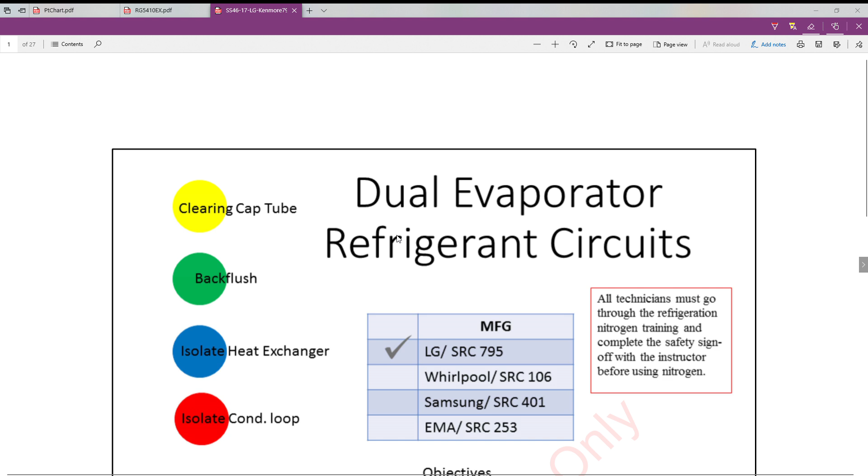So with all that said, to my sealed system brothers, my brothers or sisters, whoever's thinking about getting into sealed systems, or for those who are already in it, stick around. Maybe you might learn something, maybe you already know all of this. Nonetheless, just gonna go over some things tonight.

So tonight's training is gonna be in regards to dual evaporator refrigerant circuits. Now, if you don't have any sealed system knowledge, none of this is gonna make sense. I would say learn that first and then come back and watch this so that you'll know what I'm talking about. But if you do sealed systems, or you're interested in sealed systems, or you're studying sealed systems, this is going to be good stuff tonight.

Well, with all that out the way, let's get right into it. Okay, obviously yellow is clearing the cap tube, they're probably referring to capillary tube. Backflush represents green, blue is isolate heat exchanger, red is isolate condenser loop.

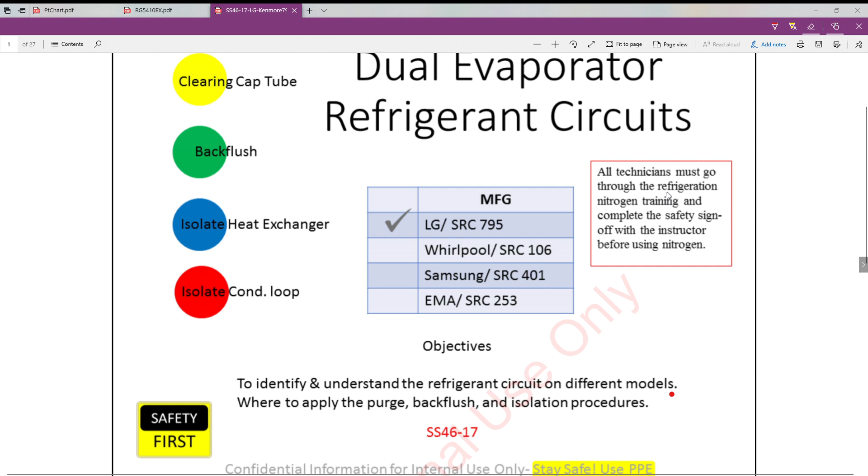Alright, this is in regards to the LG 795. All technicians must go through refrigeration training. Okay, objectives: to identify and understand the refrigerant circuit on different models, where to apply the purge, backflush, and isolation procedures.

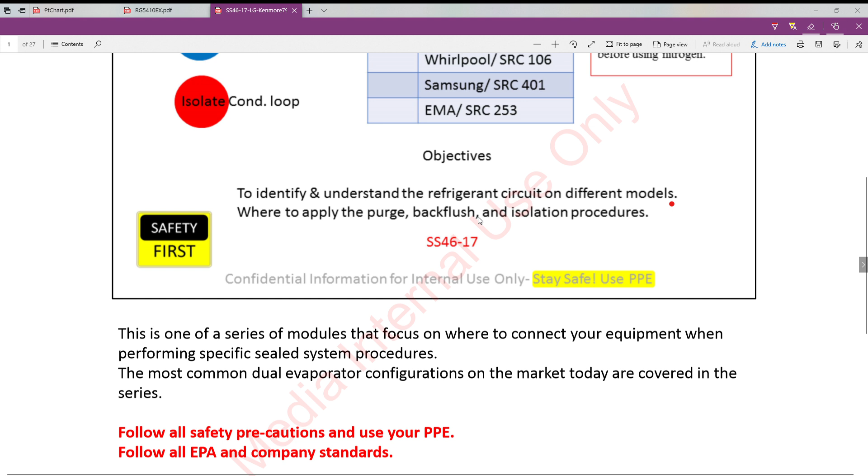Alright, this is one of a series of modules that focus on where to connect your equipment when performing specific sealed system procedures. The most common dual evaporator configurations on the market today are covered in the series.

Follow all safety precautions and use your PPE, I'm assuming that's personal protective equipment. Follow all EPA and company standards.

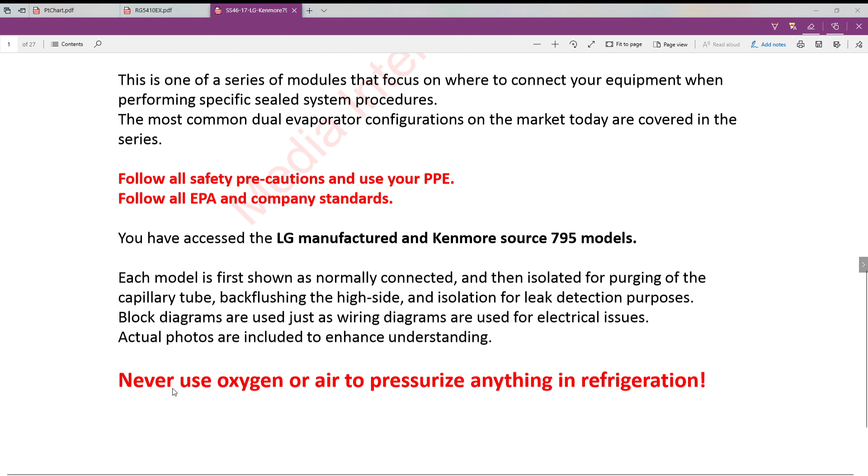Each model is first shown as normally connected, and then isolated for purging of the capillary tube, backflushing the high side, and isolation for leak detection purposes. Block diagrams are used, just as wiring diagrams are used for electrical issues. Actual photos are included to enhance understanding. Never use oxygen or air to pressurize anything in refrigeration.

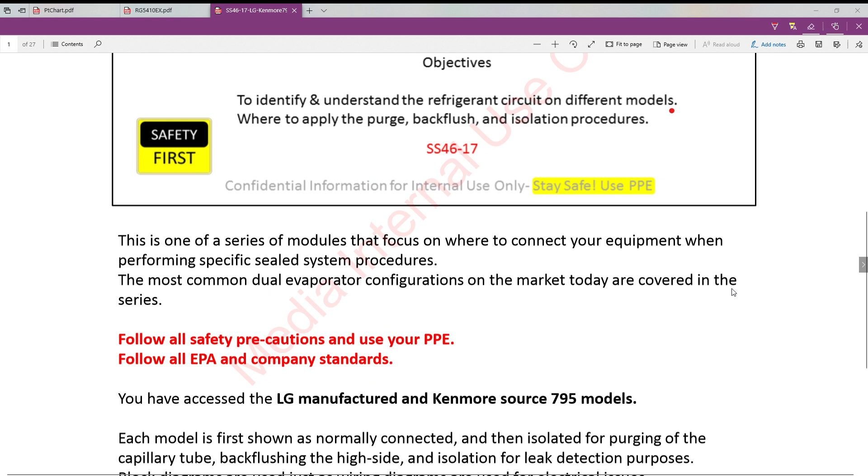Alright, with all that boring stuff out the way, let's get to the meat and potatoes of this thing. Okay, how do we get to page 2 here? Boom, there we go. Alright, ladies and gentlemen, here is your standard refrigeration diagram, let's just go over it.

I hope you can see my mouse. This guy right here: so out of your compressor, out of your high side, it's going to pass through this condenser. Out of this condenser, it's going to go through this little area right here, let's just call that your Yoder loop. It doesn't demonstrate it on here, but it does pass within the internal cavity or internal bulkhead of the refrigerator that we can't see. But after it comes out of that, it passes through the dryer.

Now we're going to go through our, well not capillary, but our three-way valve. So out of the dryer, it's going to go to the three-way valve, and then it's going to have two capillaries. One capillary is going to go to your freezer compartment, which represents FC. The other capillary is going to go to what represents RC, refrigerator compartment.

Now, if you got something coming in, you obviously have to have something coming out. So these two capillaries, this one and this one, they're going to supply our evaporators with freon, and out of our evaporators we're going to return to the compressor. There's a little check valve here, we're going to talk about that check valve and the importance of it.

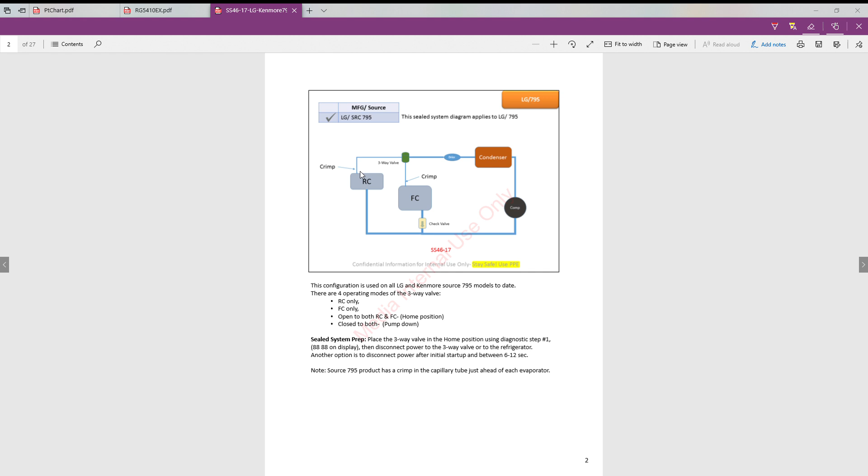All right, what the hell happened there? Okay, all right, let's see. Next page, number 3, right here.

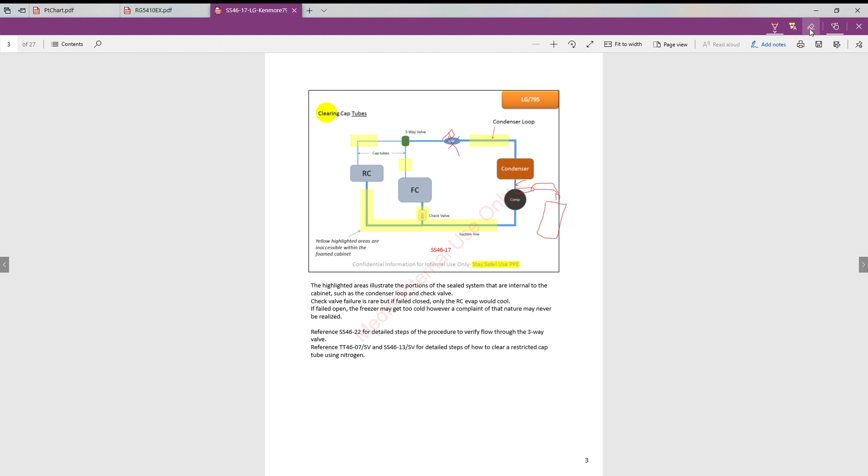Now, on my low side, right here, remember the dryer is disconnected. I would put a valve here, and then I will remove this hose. Let's remove it. Now, what I would do is I'll put the hose here to here,

and I would look at the tag and see what is my low side. It's probably like 100, 125, and then I would blow. Oh, I would disconnect here as well. I would disconnect this part from the compressor so that as I blow through here with my nitrogen, it can go here. And look at the arrow of the check valve. It's going in the way it's intended, out right here. And then it's also going to do the same thing here, because remember, we have it in the home position.

Right there. Boom. And then out. You know what I'm saying? That's my 2 cents on it.

All right, let's see. So as far as check valve failure is rare, here's how it happens. Some guys, remember this compressor, they're not showing it, but it's gonna have a process stub right here. Let's draw it a different color, let's go blue. Let's say that process stub on there, guys are gonna hook up their hose, right? They're gonna hook up their hose. So they're gonna come here to the process stub and go right here, and they're gonna go right here.

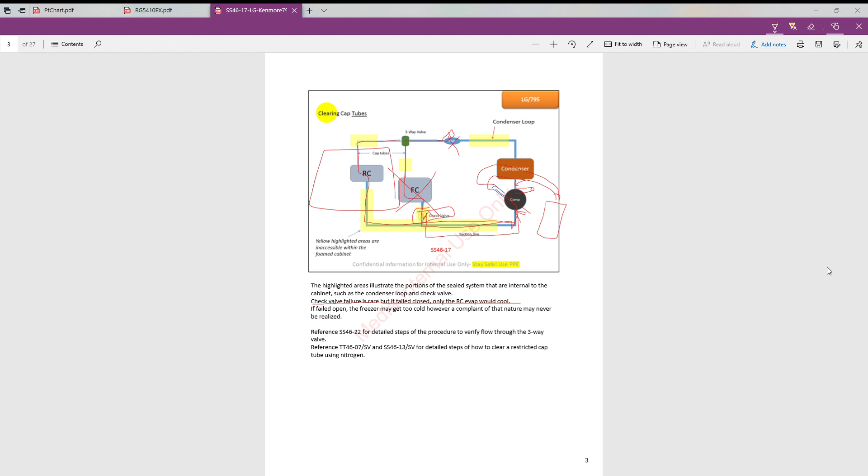Going on to page 4. Boom. All right, so we got some visuals here. What do we got here? Why is this so? All right, well, apparently the screen is here.

All right, so here's our compressor, big black hermetic mushroom shaped guy right here. Big black hermetic seal with the white label on it, right? That's your compressor. Here's your process stub, right? That's where you're gonna do your evacuating, your charging, stuff like that. But remember that this process stub is one and the same as this suction line or low side. Okay? This is your discharge, and as you see, the arrows in yellow, it's going right to your condenser.

Your condenser is more than likely always next to your compressor, but sometimes it may run up the back wall or on the bottom of the box. But typically, the condensers are normally always outside, and the evaporators are normally inside.

After it comes out of your condenser, let's... is there a way to zoom in here? What the hell is going on here? How do you zoom in? Okay, that's contents. Anyway, we'll get more pictures.

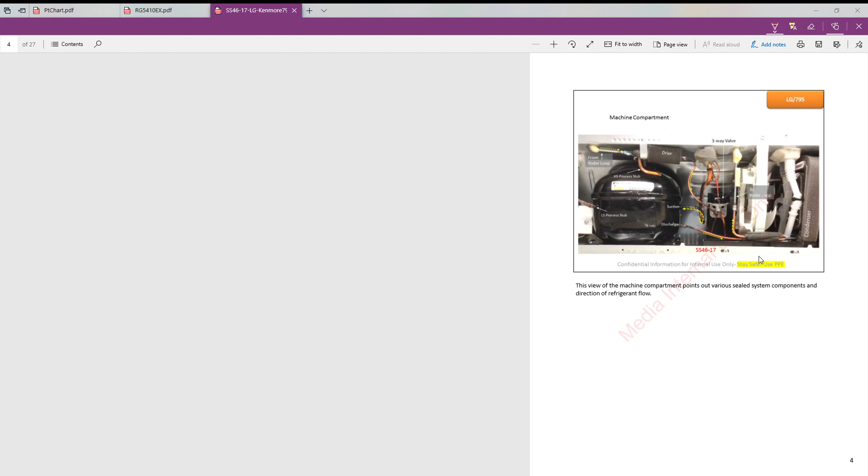Okay, oh much better guys, much better. All right, so again, this is your compressor. We barely see him, but here's your compressor, the black silhouette.

Again, this is your suction line. This goes inside of the cabinet, but this is where your refrigerant, after it comes out of the evaporator, is returning to the compressor. Okay, this is where the compressor is sucking it back toward the compressor, and out of the compressor is going to your condenser.

But for this slide demonstration purposes, they're talking about this three-way valve. Well, let's look at it. You got 3 copper tubes going to it, right? Or coming out of it, or hooked up to it.

Okay, notice one goes to FC evap, freezer compartment evap. One goes to refrigerator compartment evap. And then one, this one here, is coming from your filter dryer.

Okay, now let's see what this says. The blue band on the port tube connects to the refrigerator capillary tube. They're talking about this little blue band here. Right there, you see it? Blue band. But we'll get into that.

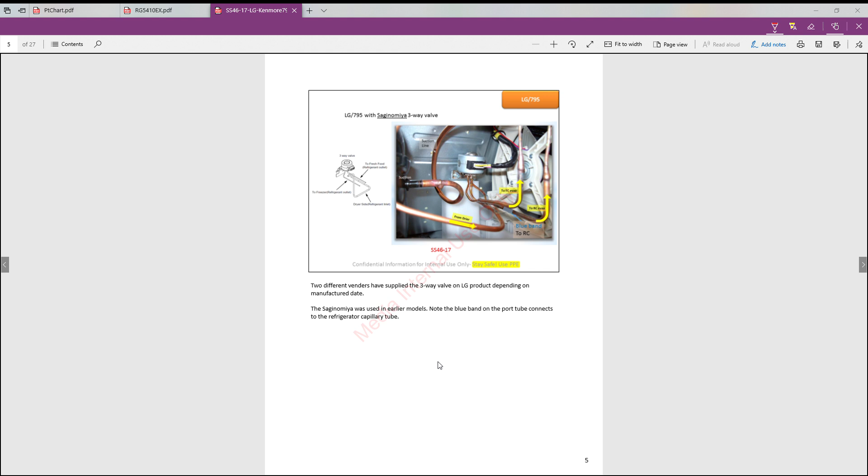For now, stand by on that, because we'll get into that. Anyway, let's look at what we got here. Here's our filter dryer up here. Again, out of our filter dryer, after it comes out of the Yoder loop, first stop out of the Yoder loop, filter dryer. After the filter dryer, it's going to go to that three-way valve.

The third copper tubing is the copper tubing that's coming off the dryer. Okay, again, this discharge is going to the condenser. Off the dryer, this little tube here is our high side process stub. We discussed that on the compressor, the third copper tube coming off the compressor is your process stub on the low side, because that and the suction is one and the same. Well, if we wanted to get into our high side, off of the dryer is how we would get into our high side. Okay, let's move on to the next slide.

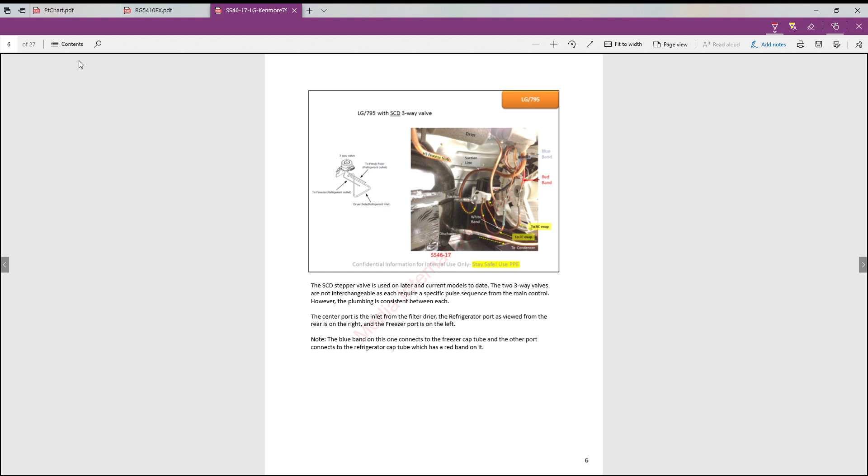All right, let's see what they got to say about it. An initial attempt to establish a clear capillary after recovering. Oh yeah, you remember you got to recover the system. Recovering the system charge requires cutting RC port at the three-way valve and cutting the suction line between the cabinet and the compressor. This illustrates the RC cap.

Guys, the way I'm saying it, in my opinion, would be the best way. That's what they're saying, but nah, I have better luck doing it like this, from the inside and blowing outward. Or you can blow from the rear as well and cut here. You can do it either side, whatever you're comfortable with. But that's what I would say that works.

Okay, what it says? Use up to the maximum of nitrogen pressure, but do not exceed the low side design test pressure rating. That's what I'm saying. See, like it's saying here, do not exceed 170 psi if the low design pressure is rated above 170. So even if it says it's 170 or higher, don't exceed 170. So follow the tag. If it says 120, 130, 140, stick to that, but never exceed 170.

In this setup, the check valve prevents any nitrogen flow through the freezer evaporator in the reverse flow purge. See, that's what they're talking about, like doing it here. That's why I don't do it from this side. That's why I do it from the normal flow so that I don't interfere with the check valve. If you do that, you don't got to worry about it.

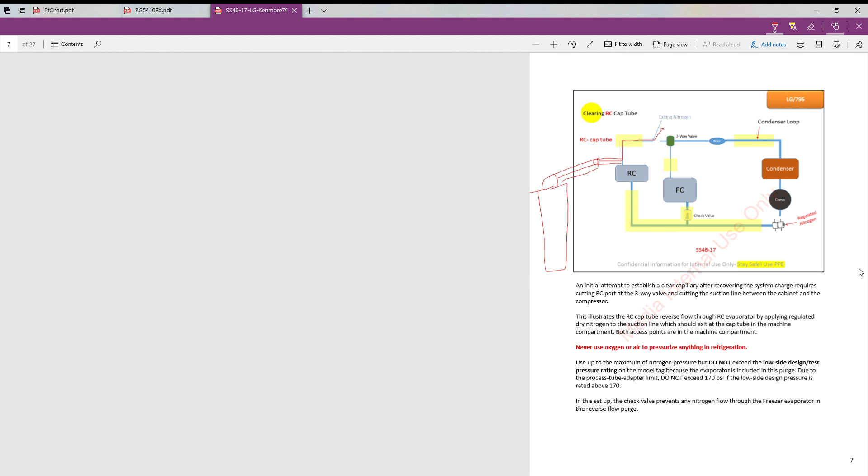All right, let's see what the next tag is. Next slide. Whoa, look at that. There we go, there we go. Okay, so here's what your...

Okay, look. Here's what your inside of your freezer. Here's what the inside of your refrigerator evaporator coils look like. So again, as it's coming out of this, remember the red band? Red band means the refrigerator. Red refrigerator, think of that. Blue freezer, blue cold, blue. Brr. So red refrigerator, blue freezer.

All right, so refrigerator comes here. It enters your evaporator, and then the thick copper line is what's going back into the bulkhead. That's what this one represents. This big thick copper line here, going back to the compressor, the one that says suction line. So from here on the thick copper line, that goes to here where it says suction line, all right? And then RC evaporator capillary from here goes inside, and that's the little thin line we see here, okay?

Same thing with the fresh food, I'm sorry, freezer compartment. Blue band enters, I guess the one with the black tape going around it is the one that comes back to this thick tubing, which comes back to where it says suction line. Okay, once again shown here on the actual product, dash lines are drawn where the heat exchangers and check valve are inside of the foam cabinet wall.

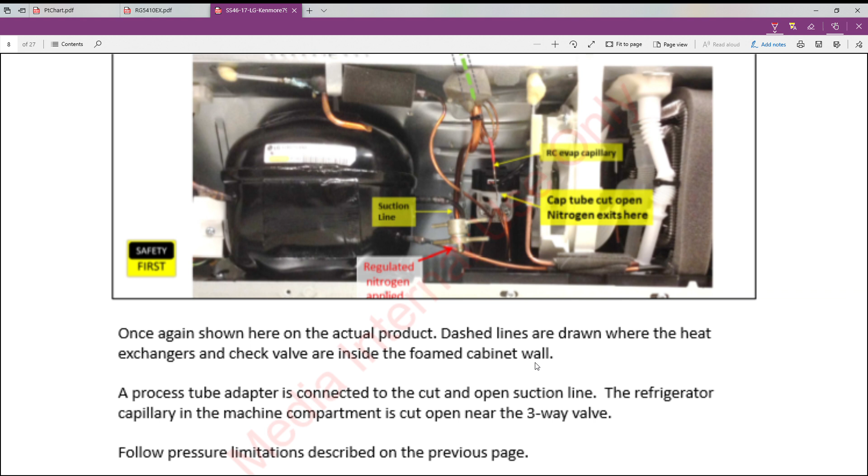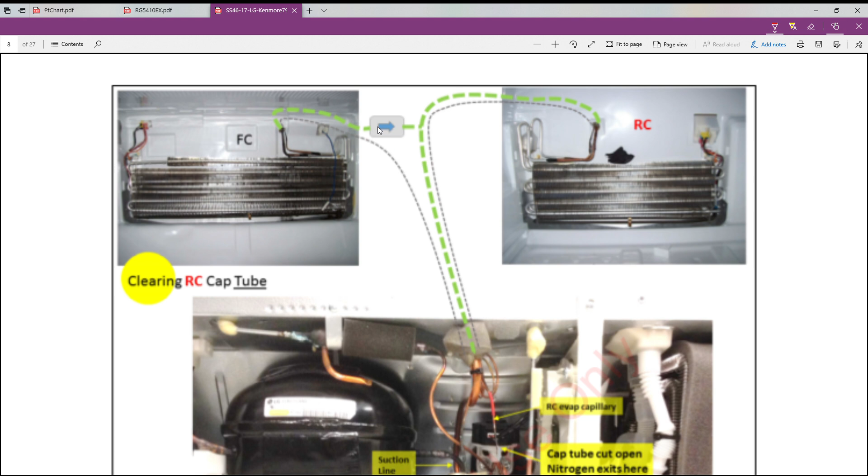The dash lines are where the heat exchangers and the check valve are inside of the cabinet. We can't see them because of the actual cabinet, but these green lines represent that. So this blue check, there's our check valve, here's our heat exchanger, and the green dashes. So blue dots are your capillaries, green dashes are your heat exchangers, and here's your check valve.

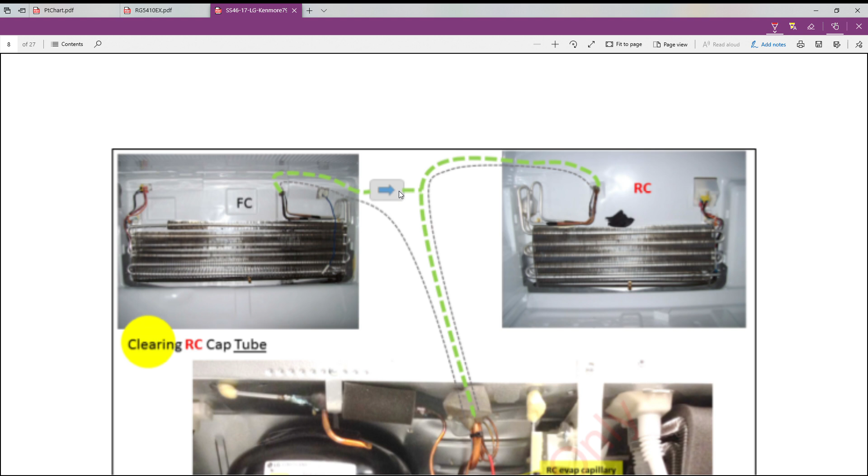Now what's this saying? Follow pressure limitations described. Nitrogen applied to the suction line goes through the RC evaporator, through the refrigerator compartment evaporator, and returns through the cap tube, which is open to the atmosphere, disconnected from the three-way valve in the machine compartment.

Place a shop towel and a container at the exit point whenever purging in order to collect debris and also to see it. What are you blowing out? Does it look beat up? Is it black? Is it oily? You want to keep blowing nitrogen through the system until you don't see any more of that junk.

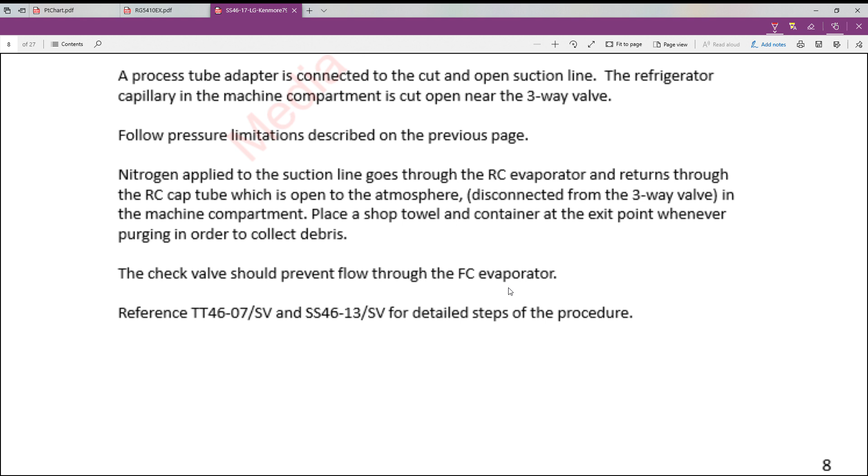The check valve should prevent flow through the freezer compartment evaporator. Again guys, if I do anything through the low side, very low pressures, 85 or less, because again that check valve, man, I'm not trying to blow it.

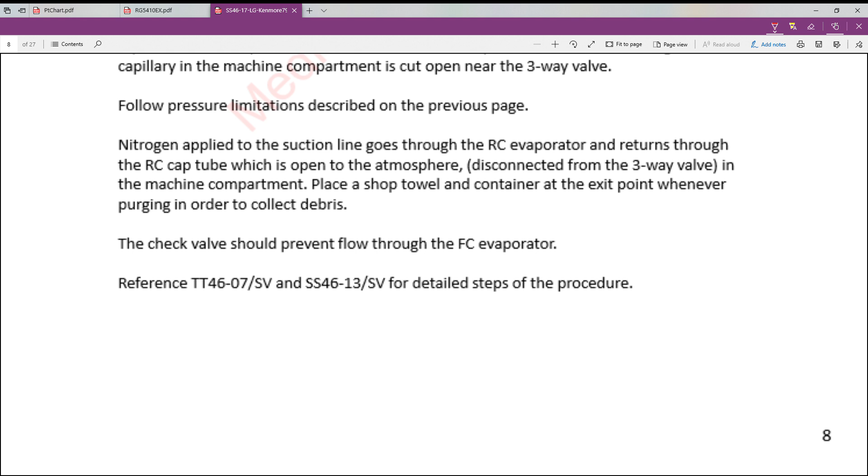All right, what's next? Oh, look at that, look, they even drew one into the diagram. So remember, we were talking about clearing the capillary tube on the refrigerator compartment. Solder one of these bad boys, cut it out of the three-way valve. Remember, RC red band, cut it out right here by the three-way.

Blow through and out of the capillary where it enters the refrigerator compartment is where you're gonna have the nitrogen exit the system. So if you was to go from the three-way valve, it would exit in the refrigerator compartment right here in this area. Remember, you got to disconnect it though. You got to unsolder the capillary from that evaporator, and you'll feel it come out like psh. You want nice, good flow. You don't want like a hiccupy, burpy, like nah. You want to just psh, nice and good pressure.

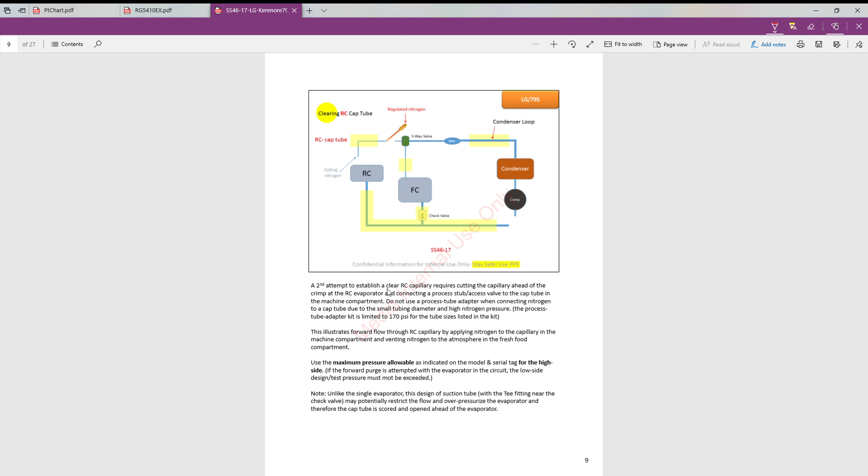All right, what else we got here? A second attempt to establish. How many more pages we got? 10, 11, 12, 13, 14, 15. We may have to do a part two of this, ladies and gentlemen.

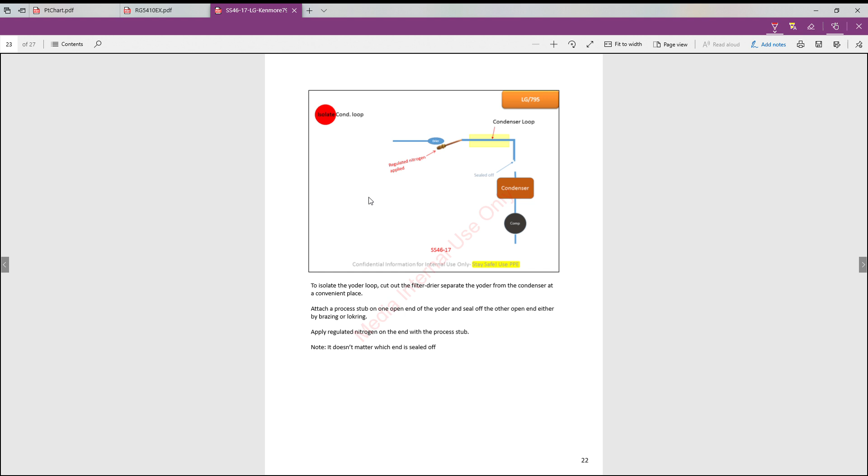Oh yeah. Oh, they want to... oh yeah, because we got to do the side. Oh yeah, whew. Oh yeah, we got a lot of work to do. We got a lot of work to do. Ladies and gentlemen, that was part one of probably part 3 or 4.

This is probably my first real online, like hardcore training with you guys. I don't know if 100% of this made sense. Remember, I'm doing all of this from a computer, I can't see you, you can't see me. If it made sense or didn't make sense, I was just experimenting tonight, and I wanted to debunk or make sense of some of these big LG dual evap problems the guys are having out there.